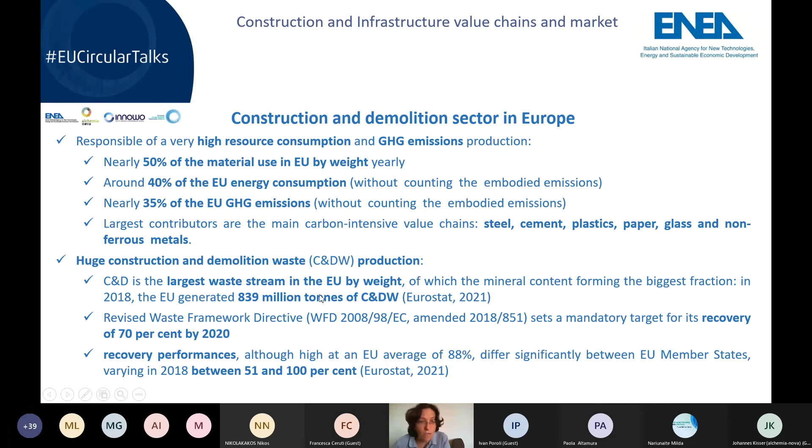Whatever they will come from, whether this value chain of construction infrastructure, or even if they are coming from other value chains, whatever sectors they are. Last year we did some work for the previous circular talk, the previous seminar we did.

We focused on some strengths and some weaknesses of this sector in Europe. There are some strengths that are also opportunities to improve in material circulation, and in improvement of the production processes.

There is potential in extending the lifespan of products, and in the huge amount of construction demolition waste, which from one side is a problem, but from the other side can be a potential for reutilization.

But in my opinion, this potential matters when it is used in substitution of primary materials. So construction demolition waste is useful and a very good opportunity, but only when used in substitution. In this regard, there is still room for improvement.

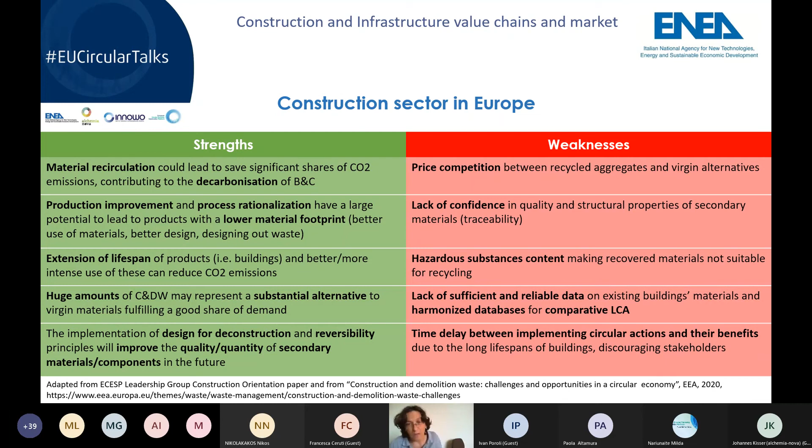Last year we did a first orientation paper, which is available online, where you can find data on policy background, contribution to carbon neutrality of this sector, and so on. Now we are going to update this orientation paper, which will lead to an output paper of this twin event, available after the event. So please stay online and stay tuned to have this output paper when it is ready.

Last year, through the orientation paper, we focused on some areas of intervention to improve circularity in the construction sector. This year, we will do something similar during these twin events, trying to gather contributions from stakeholders participating in this event to better understand the strengths and potential of these sectors in the transition to the circular economy.

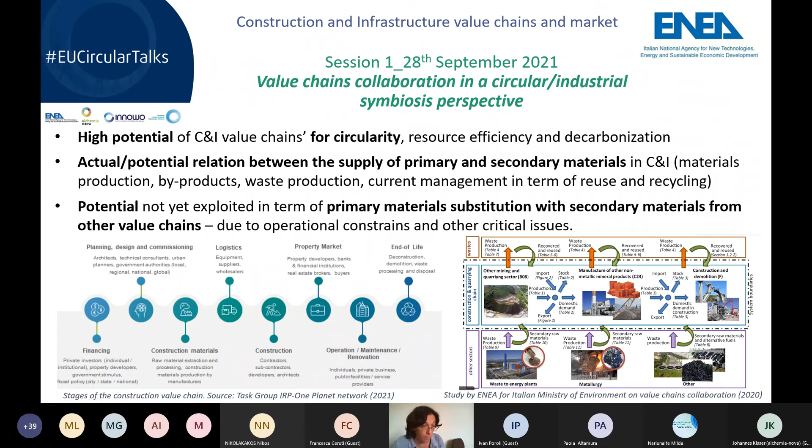The session on Tuesday will focus on the market of primary and secondary building materials. Here are listed some barriers and levers, but we will discuss this part on Tuesday.

Now, to end my speech, I would like you to contribute to this first poll by going to slido.com and typing this code to participate. The Slido will be open during the session, and you'll be asked which issues you think are most strategic in order to boost value chain collaboration and connection within the construction sector and with other sectors. Please connect to Slido, type the code, and contribute to building this map.

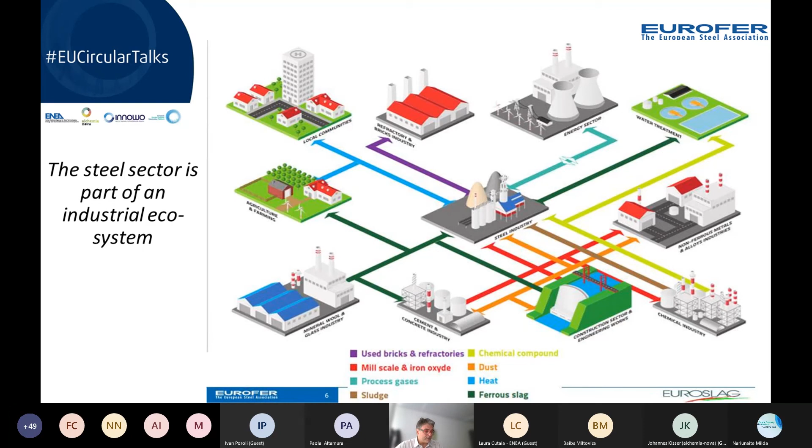So, well, the steel sector — we are talking about symbiosis. If you look at this graph that I prepared based on a European survey, you see the steel industry has, for decades, been working in this way using synergies. We exchange as many material streams as possible together with other sectors, aiming at having nothing go to waste. We exchange with cement, construction, agriculture, refractory industries, the energy sector, and the chemical industry. So we are part of the industrial ecosystem, meaning all industries are linked together and related. That's an important element, because the industry of the future should work in this way.

I would like to go directly to the core of my presentation. Today I would like to explore what the steel sector does with its main co-generated material. Together with steel, we generate ferrous slag. Ferrous slag comes from minerals and is used to protect the steel during liquid production, and this material also gives the steel its properties. That means they work in a sort of symbiosis themselves — without ferrous slag you cannot have steel. Every part of our process generates a different type of ferrous slag, meaning there isn't just one type; there are different types with different properties, which means we generate different types of artificial stones or aggregates.

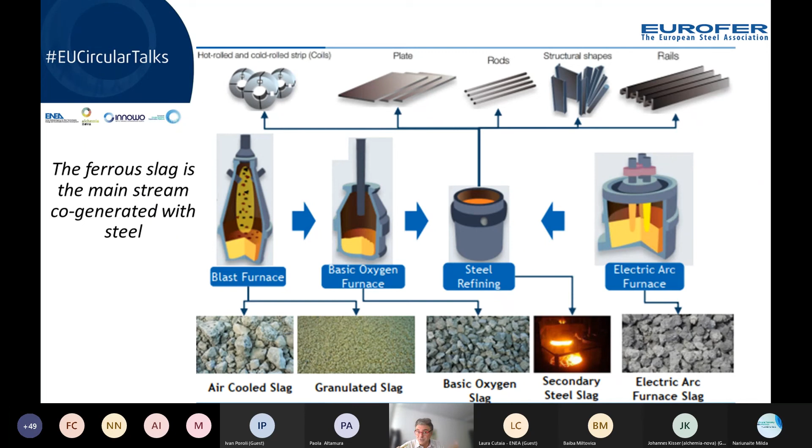If we look in terms of volumes, what does this mean? In 2016, for instance, we produced 158 million tons of steel at the European level, but together with this, the sector generated around 48 million tons of ferrous slag — that's quite a huge number. According to a survey that Eurofer performed with Euroslag, our European association collecting science and data on how to optimize the use of ferrous slag, we surveyed around 40 million tons of total slag.

We arrive at the numbers: around 34 million tons of ferrous slag is used among cement, concrete, additions to cement, road construction, engineering works, and so on. This makes ferrous slag a huge contributor to the construction sector as a secondary raw material.

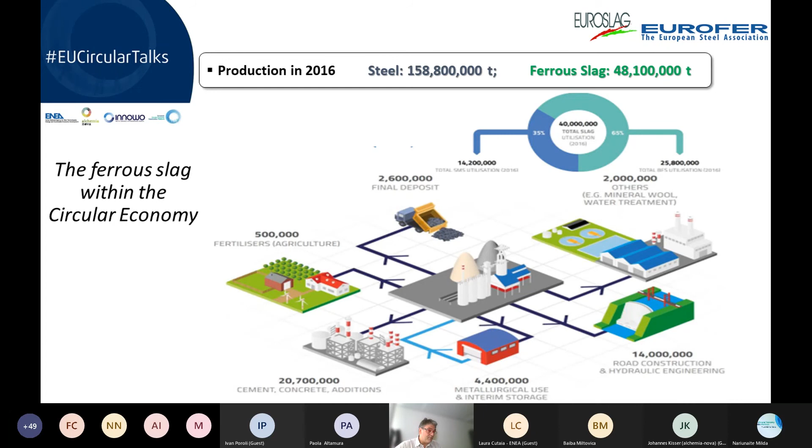Going more into identifying what ferrous slag is and its properties. Someone says the ferrous slag is waste from the steel sector. Well, I don't agree. The ferrous slag is material that is fatally co-generated with steel, not generated by chance, but together with the material. The industry now is working, and has been for decades, to improve the performance of this product. That means it's not waste that's just put aside waiting to figure out what to do with it. No, it's the contrary.

The ferrous slag comes out in a liquid phase, and then we try to give the material the right properties for the perfect use. For instance, we have granulated blast furnace slag that comes out from our primary production. This is almost 100% glazed and is latently hydraulic, which makes it perfect to work in synergy with cement or other cementitious materials to create new, more sustainable products for the future.

Or we have slag from the blast furnace that is not granulated but air-cooled. Then it becomes like an aggregate, like a stone, with a crystalline structure and is inert. Or we can have slag from an electric arc furnace, which is secondary production using ferrous scrap. Then there's some new process to granulate and vitrify the material in order to give it the perfect properties.

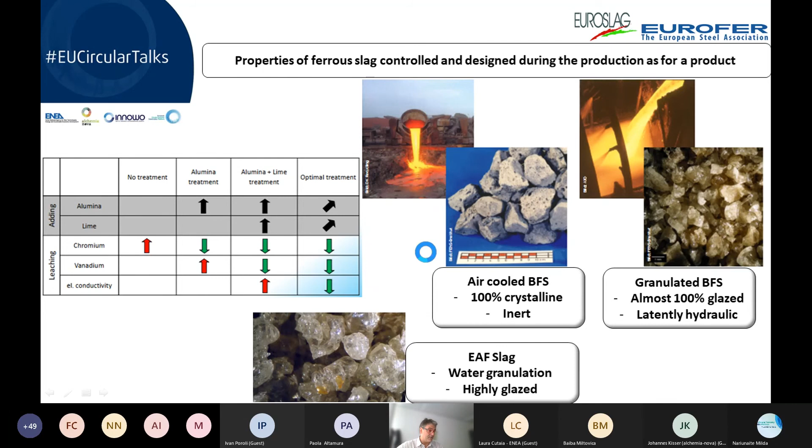Then you add some alumina, some lime, so we arrive at the right recipe just to ensure nothing will go into the environment. That's rather different than saying ferrous slag is waste. It's more a secondary raw material. And in fact, I put together some photos and examples.

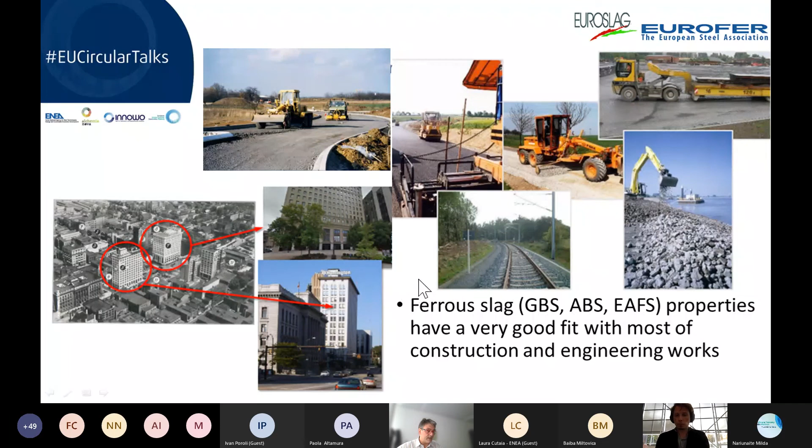Or you can use ferroslag to replace aggregate for road construction. Sometimes, in certain applications, I would say ferroslag gives better performance because, for instance, the asphalt has more grip, there is more resistance. The layers below the asphalt are more durable and can last longer, giving high bearing capacity.

But going directly to what to do, what is the problem. I have still two slides and then I finish, Johannes.

The legislation: the ferrous slag for us is a byproduct, it's not waste. However, European law has different interpretations across countries, and there is no level playing field. For instance, procurement instruments often don't allow secondary raw materials in public tenders. Then, I've already heard it called a hazardous substance, but the pure precautionary principle, in the end, doesn't fit with circularity, because you cannot clean everything. The point is you need to create real conditions to have no risk. Otherwise, you will not have circularity.

The ferrous slag is REACH registered. That means there have been years of toxicology tests. We have made hundreds, and it's classified as not a hazardous substance, and there is no real risk. And third, from a practical point of view, is the legislation important?

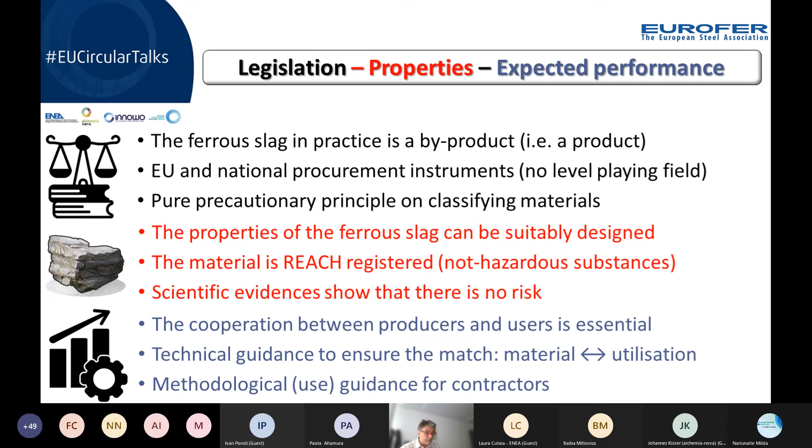Well, from our experience, it's more the cooperation between producers and users. What a user needs, which is performance, this is the starting point. You need to create a very large and robust knowledge base for technical aspects and environmental performance expected by contractors.

Rather, it's better to start working from what the construction sector needs, what the contractor needs, and from there to have a more fit-for-circularity framework, legislation that will not see the secondary resource as a waste by definition, but as something with a value.

And the last slide, just a reminder, what is necessary to be done? Well, of course, the technical approach should be harmonized. The member states have different views on this kind of material.

Secondly, I've reported here some examples. In France, there was a perfect example from Sétra, in which slag producers, contractors, and final users defined guidelines together. And the government said, well, this works. And then the slag is used there without any problems.

This is a more practical and more coherent approach: performance-based. The material you use, you should just look at the performance you expect. If it's natural or artificial, in the end, the circular economy doesn't matter.

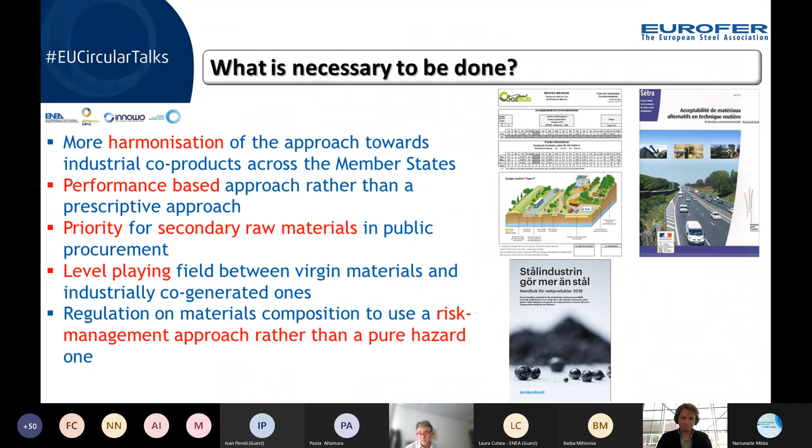I've been at my 10 minutes, maybe a little bit more, Johannes, sorry. But this is all, and of course I'm open to all the questions you may have, concerns, so I'm here. Thanks a lot.

Thank you so much, Aurelio. It was really interesting to listen to the industry side of the steel construction. It's obvious that it has many byproducts, and they should be utilized in industrial symbiosis or for any type of reuse scheme. That's clear. So thank you so much. I hope we'll catch up and we get some attention on that also in the future.

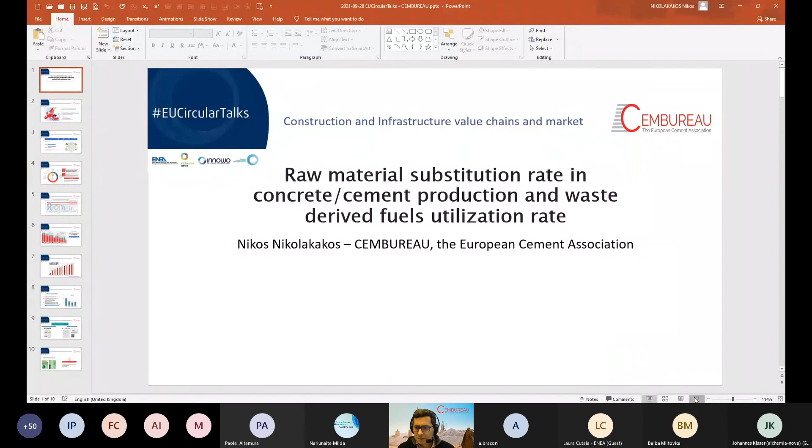Hello, Johannes. I hope you can hear me well. Good morning to everyone. We can hear you loud and clear. Thank you. Very nice to be here. I will try to share my slides. Perfect, we can see them. Okay.

I will give a presentation on behalf of CEMBUREAU about the contribution of the cement sector to the circular economy and the use of raw materials and waste-derived fuels. As an introduction, CEMBUREAU is the European Cement Association, based in Brussels. In this map here, we can see the members of CEMBUREAU, which are the national cement associations of the EU countries, plus some more countries like Turkey, which are not in the EU.

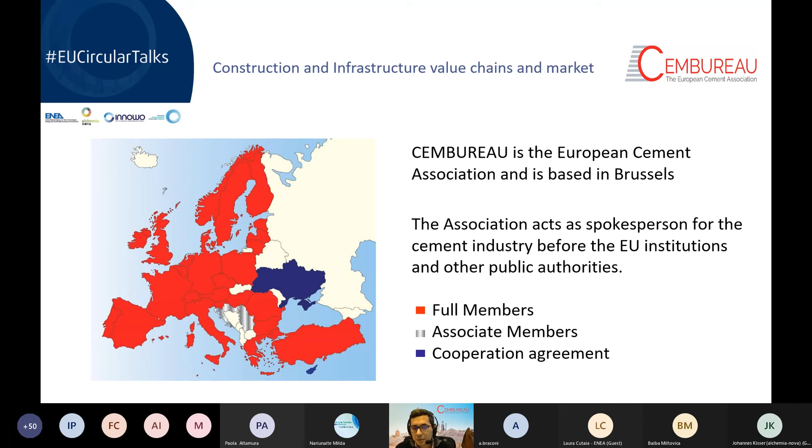The main driver for the circular economy and the policies at the moment is the reduction of greenhouse gas emissions. We see the targets set by the European Union for 2020, 2030, and 2050, and what has actually been achieved in 2015. There are several regulations like the so-called communications by the European Commission, like the Clean Planet for All in November 2018.

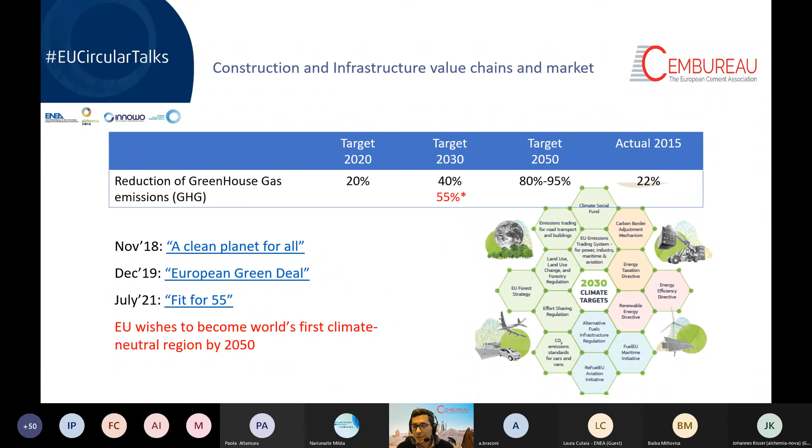2019 brought the European Green Deal, which is still active. And very lately, just a few months ago, was Fit for 55, a mix of regulations described briefly in this chart, containing many different regulations which all aim to reduce greenhouse gas emissions. The vision of the EU is to become the first climate neutral region in the world.

Now, as CEMBUREAU, what we try to do to respond to all these challenges is create a roadmap for how to reach zero CO2 emissions in 2050. We have identified different pathways, starting from clinker production, then cement manufacturing, then concrete, because cement is an intermediate product. The actual building material is concrete, then construction, and finally carbonation, which is the absorption of CO2 emissions during the lifetime of the building.

We have specific targets for the different pathways. For example, to reach 60% alternative fuel rate in 2030 and 90% in 2050, and to use decarbonated raw materials, along with specific policy asks like access to non-recyclable waste and biomass waste, facilitating waste shipment, and very importantly, banning the landfilling of waste.

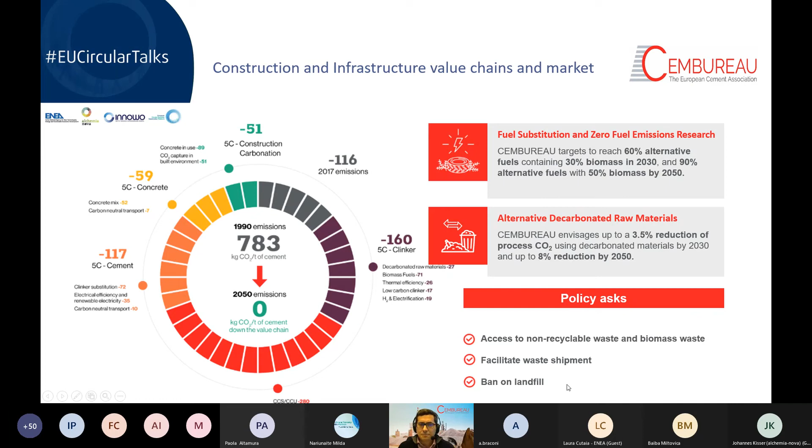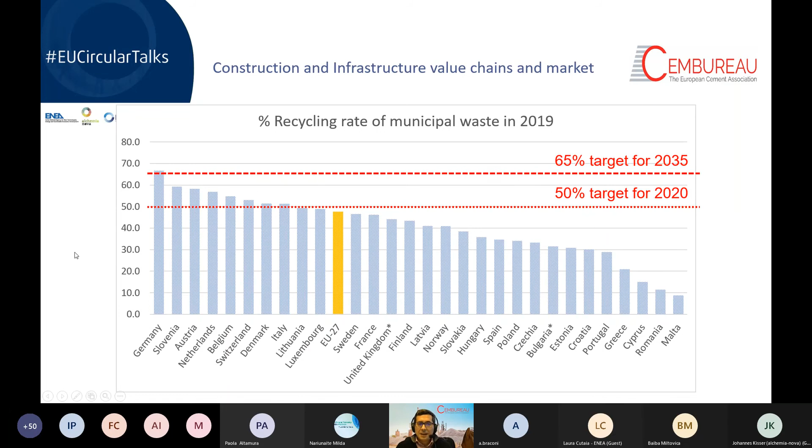What's interesting is the rate of co-processing, the use of alternative fuels in the cement industry to substitute fossil fuels. This rate was measured by the consulting company Ecofys in a study prepared for CEMBUREAU in 2017. We see that countries with a high rate of municipal waste recycling also have a high rate of co-processing, and the opposite: countries with low co-processing have low municipal waste recycling.

This led to a conclusion that it's not technical investments or technical aspects that hamper the increase of use of alternative fuels and waste-derived fuels in the cement sector, but rather having a good, advanced waste management system so there is available material to use in the cement sector.

And this is where our support for policies comes in, like reducing landfilling, increasing landfilling taxes, banning landfilling, and improving separate waste collection.

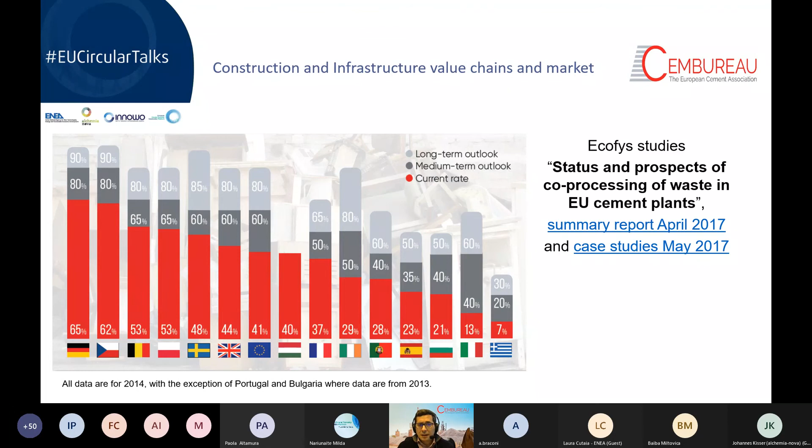The other 50% comes from fossil fuels like petcoke and coal. Our aim is to reach 90% substitution rate, so almost all the thermal energy comes from alternative fuels.

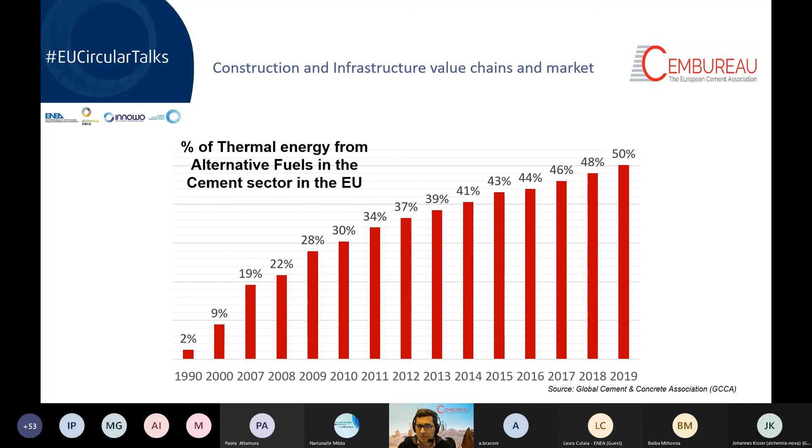Some advantages of co-processing, this technology of using waste for heat in the cement sector, is that it combines both material recycling and energy recovery, because the mineral part of the waste, like the iron contained in end-of-life tires, becomes part of the clinker, so it's a kind of recycling. Also, cement kilns represent existing and available installations, so there's no need to invest in new waste-to-energy or waste incinerator facilities.

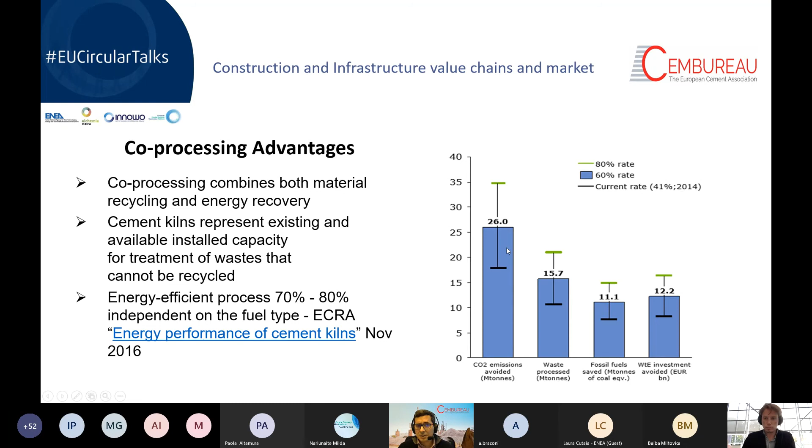This is some of our policy asks at European level, and also to use both high quality and low quality recycling. We believe there is room for both.

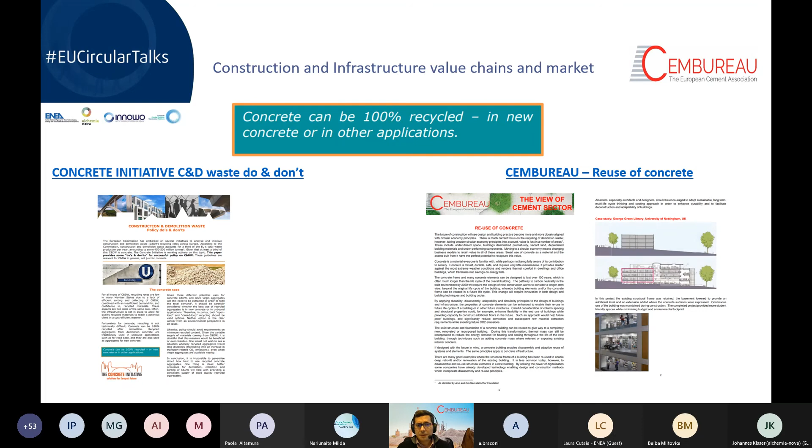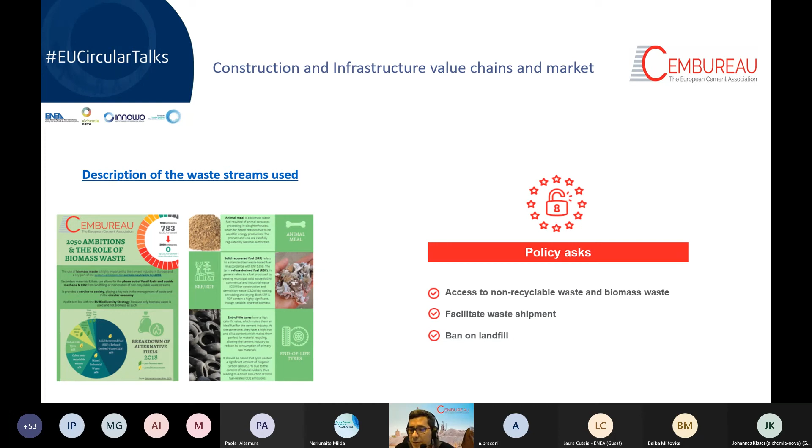I have not covered the raw materials used for cement production. As Aurelio said before, blast furnace slag is a material that has been very well used in previous years, very well established, and it's a very good material for the cement sector. Thank you very much for your attention, and I will be glad to answer any questions that follow.

Thank you. That was a great view on how the cement industry looks at that, and I think that's applicable to the whole cement industry in general, and also this reuse of construction demolition waste should become the norm. I still see some hindrances, but I also see many applications in this urban mining.

When we were searching for smaller crushing equipment, like concrete shredders, it was not always easy to find in all the sizes that we want, but I'm sure the market will catch up on that as well for reuse and then reconstruction. So great, thank you, Nikos.

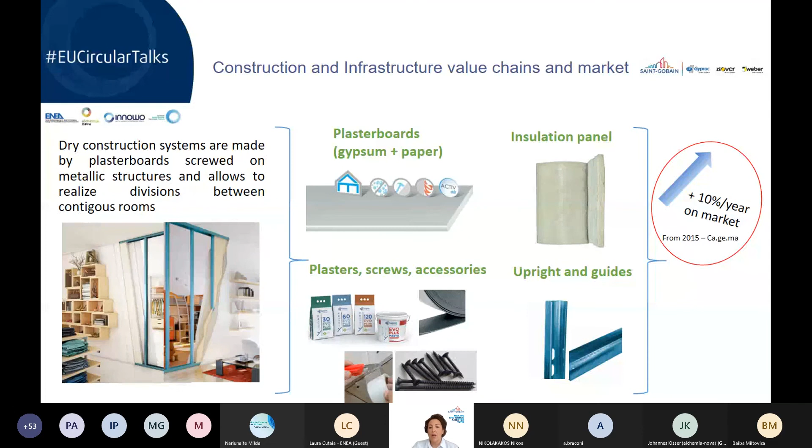Dry construction systems are made of plasterboard and very often insulation panels screwed onto a metallic structure, used to divide contiguous rooms. Today I'll put the attention on the main components: plasterboards and insulation panels. This kind of construction system is a modern system that has grown a lot in recent years, about 10% per year since 2015.

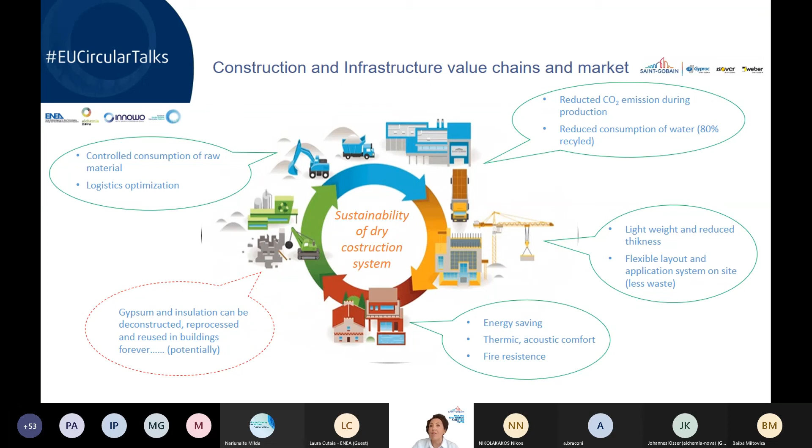And surely this is due to the sustainability of the process, the chain of this kind of construction system. But the weak link for the construction chain, the using chain, is the end of life of the products, because even if gypsum and insulation can be deconstructed, reprocessed and reused in building forever, actually it doesn't happen. And market data shows this, because more than 50% of dry construction system waste is sent to landfill, because there isn't a controlled waste management chain, because there isn't a specific recycling solution, and because the costs for waste management are very high.

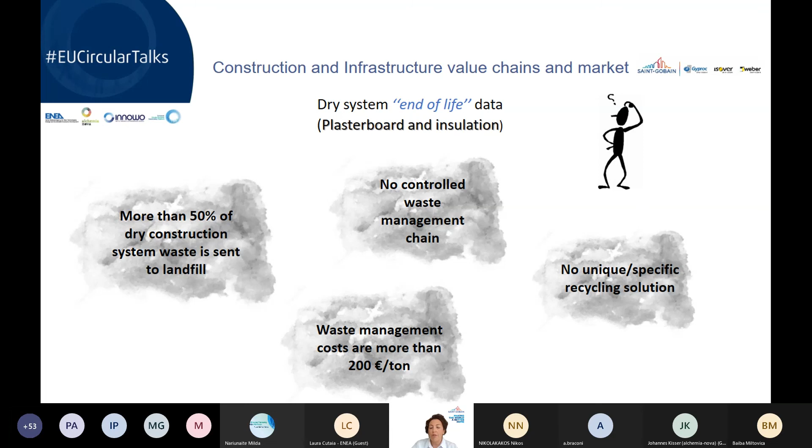So to understand the problems, we have to talk differently about the plasterboard industry and the insulation industry. In the plasterboard industry, the situation is quite good, because more than 80% of internal scraps are recycled in production plants, and because production plants are able to substitute more or less 5% of raw material with recycled gypsum, mainly from internal scraps but also from the construction demolition sector. And now, since 2 or 3 months, many producers have launched 2 or 3 products on the market that have a high recycled gypsum content.

In the insulation industry, the situation is not so good, because in production plants just 3% of internal scraps is used, and none from construction demolition. And a great quantity of production insulation waste, but also construction demolition waste, is sent to landfill and treated as dangerous waste.

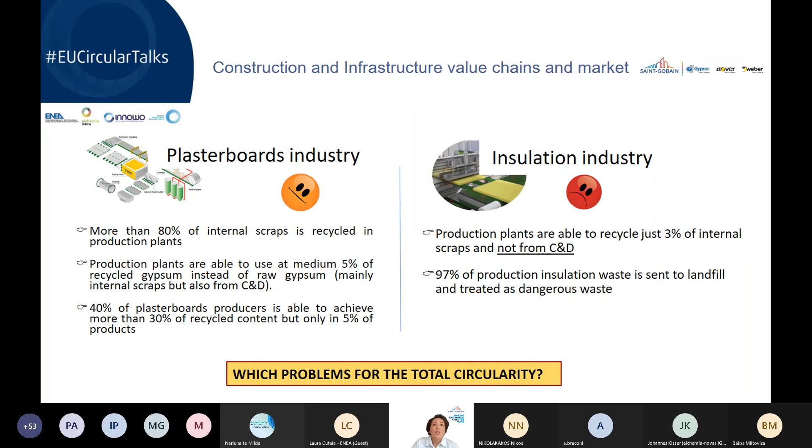So the question is, what are the problems for circularity? The first problem is found on the building side, where there isn't a culture of selective demolition, partly because the legislation is not sufficient for this aspect. Controls don't exist at the building site, and wastes are mixed without a selection that should instead be made to guarantee recyclability of waste.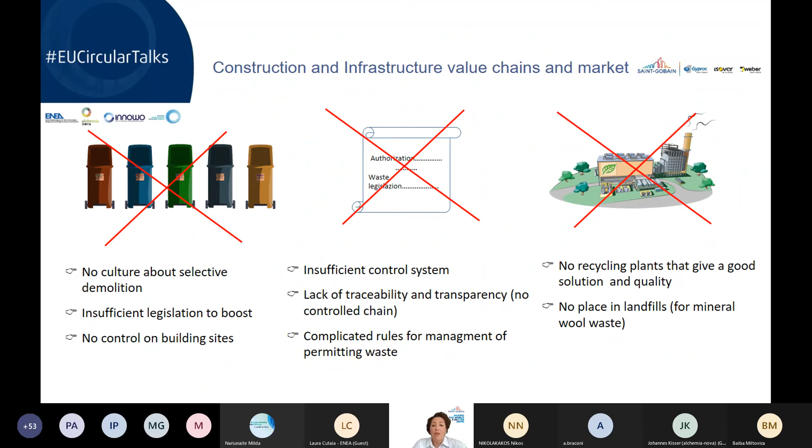Furthermore, legislation gives very complicated rules for management of waste, and the authorization process is very often too long. As a consequence, but not only for this reason, for gypsum waste there aren't well-performing recycling solutions, and for insulation waste, we don't have any recycling solution at all.

So another time we put a different attention for gypsum waste and insulation waste, because in national territory for gypsum waste we have 4 recycling dedicated plants, but only 4 for the whole territory, and we still have availability in landfills. So what happens in the construction site?

It happens that gypsum wastes are mixed very often with other construction demolition waste without selection and sent to landfills or general recycling plants. And this is a problem because there isn't traceability for waste to have a good recycling process and a good secondary raw material.

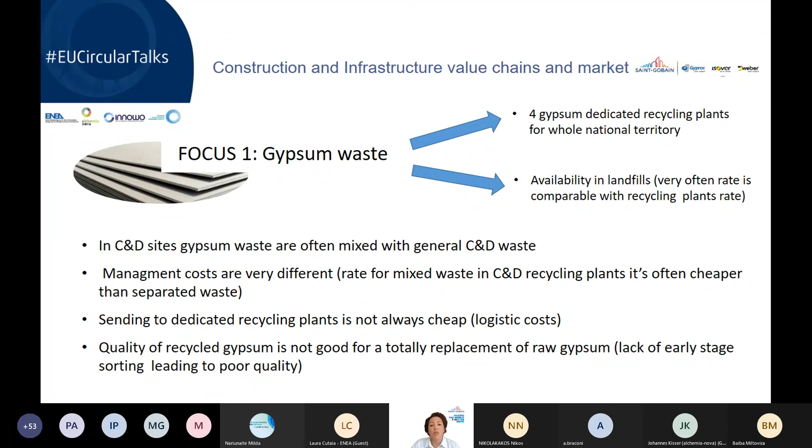For insulation, the problems are greater because we don't have a recycling solution, and we don't have enough availability in landfill. Even though there is confusion in the characterization of waste, because waste coming from modern insulation panels is surely not dangerous since the fibers are biosoluble.

But the problem is when the waste comes from old panels, because it's very expensive to analyze the fiber when it becomes waste. So when waste arrives at landfill, all types are considered dangerous and sent abroad, because abroad we have more availability and the costs are cheaper.

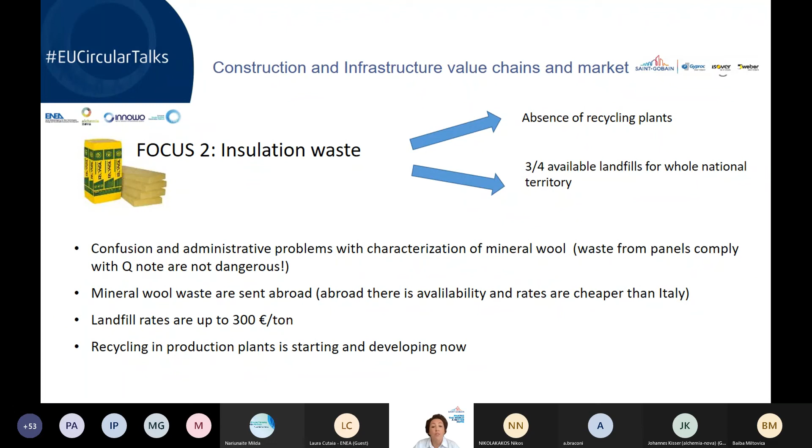So to summarize, there isn't a clear system of control and characterization of waste in construction demolition sites. It's difficult to develop a controlled management chain for waste. It's difficult to have a performing recycling solution.

And as a consequence, the quality of secondary raw material is not good enough for a total replacement of raw material. And the management chain is very expensive compared to the supplying of raw materials. So we don't have circularity.

Fortunately, something is changing because there is a shared willingness between producers to implement a controlled value chain for their products, because the dialogue with the authorities is more constructive and productive, because industries are investing in new technologies to implement a new system to use secondary raw materials, and because national regulations are moving toward sustainability and circularity to improve green procurement.

So which opportunities can we catch? First of all, we have to use any possible financial form — resilience and recovery plans, but also other financial forms to upgrade technologies in the industries and also to upgrade recycling technologies.

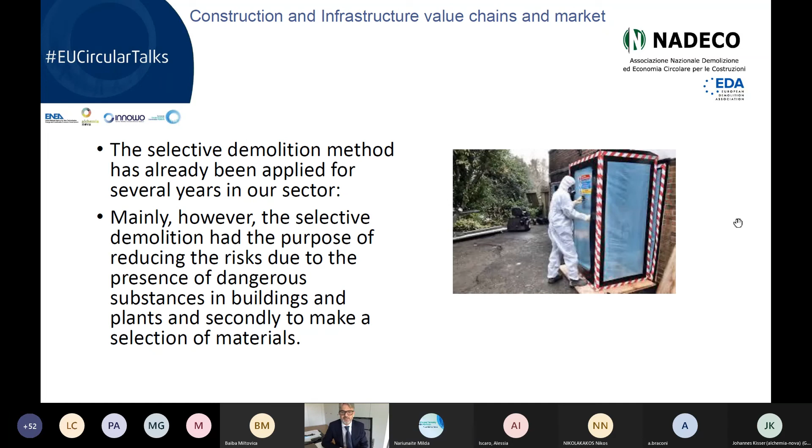Selective demolition taken to a higher level needs an adequate preventive design to identify the types of materials and the best selective removal techniques: more space for storage of separated waste for different types, more execution times, more manpower hours to remove the materials, new machines, and new operation procedures.

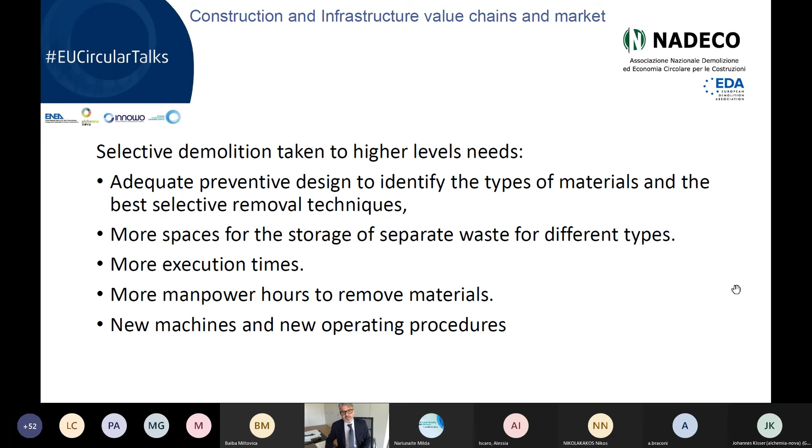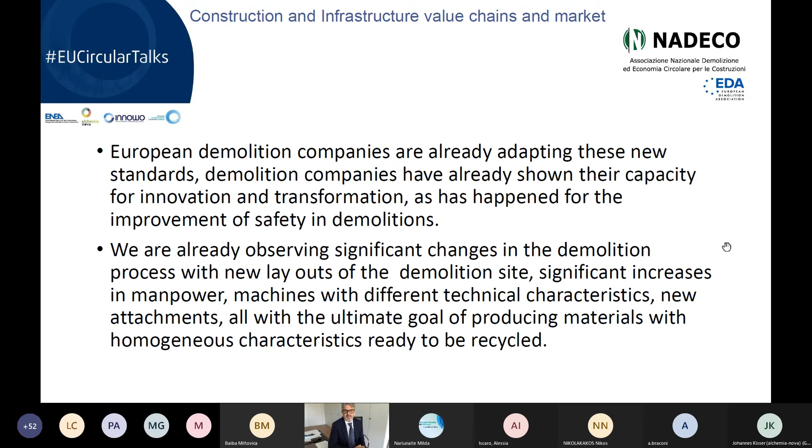European demolition companies are already adapting to these new standards. Demolition companies have already shown their capacity for innovation and transformation, as happened for example with improvements for safety in demolition. We are now observing significant changes in the demolition process, with new layouts of the demolition site, significant increases in manpower, machines with different technical characteristics, new attachments - all with the ultimate goal of producing materials with homogeneous characteristics ready to be recycled.

But all this is not enough. Today, the balance between costs and benefits still hangs dramatically towards the cost. For example, costs include the risk of penalties because the law is very complicated in many countries in Europe. More space is needed to perform a selective demolition, more execution time is needed, and it involves higher costs of safety and higher costs for manpower. The benefits now are poor.

Typically, a lower disposal cost is achieved if the waste is correctly separated and treated. There is also the economic value of materials - if, for example, the scrap is very clean, the economic value can rise. But these benefits don't balance the cost. So what are we doing to balance the cost and the benefits?

In order to start the virtuous process of a circular economy, an effective incentive system must be combined with selective demolition. Incentives can shift the balance point toward the benefits. What could the incentive system be?

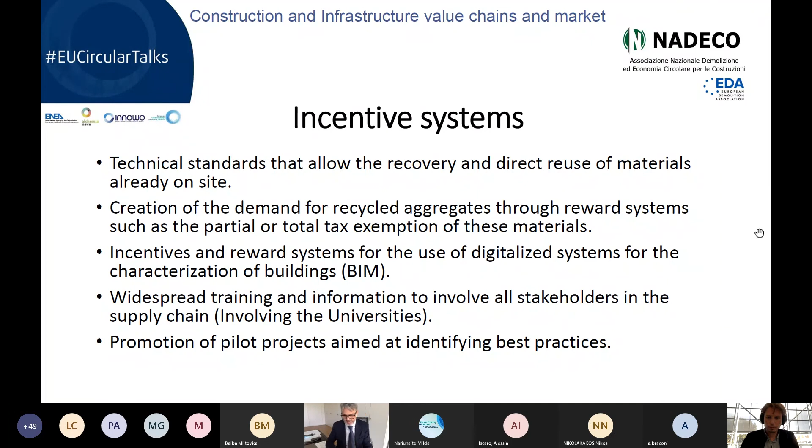In conclusion, we think that circular economy in the demolition market will be supported by three pillars. The first pillar is that of companies. They must develop a new approach, a new technical and design approach to the demolition project.

A contribution to the development of new machinery for selective demolition. Development of a clear definition of recycling targets for each project, operation procedures, and the concrete feasibility of the project. The second pillar is that of the government, which must issue an adequate regulatory and law system.

Applicability of the end of waste criteria to the highest number of construction and demolition waste categories, the possibility of treatment also on site, creation of an incentive system, and the market. The third pillar is that the market must evolve towards a real market and economically sustainable supply chain for recycled materials, and a real market for the reuse of demolition objects.

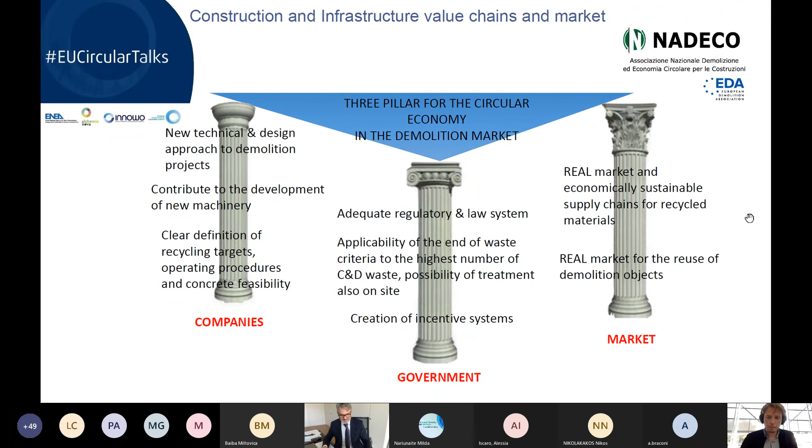Thanks for the kind attention, and I'm sorry for my bad English.

Thank you very much. Thank you, Ivan. I think it was all right, and we all understood. It's a very nice wish list, like sending it to Santa Claus for next year. Santa Claus is near. That's almost like if we all implement these solutions, I think we have solved most of the things. So thank you so much, Ivan. This was a very nice overview of recommendations that we need for implementing circular economy thinking in the construction sector.

Now we have two speakers left, and I'm happy now to introduce to you Margherita Galli from Federbeton. She comes from environmental engineering and economics, and worked at ISPRA, which is the Environmental Protection Agency from Italy, and then for many years in the concrete area from ATECAP and now Federbeton. Please, Margherita, the floor is yours.

Thank you. Thank you. Good morning, everyone. I will share my presentation. Can you see it? Yes. Okay.

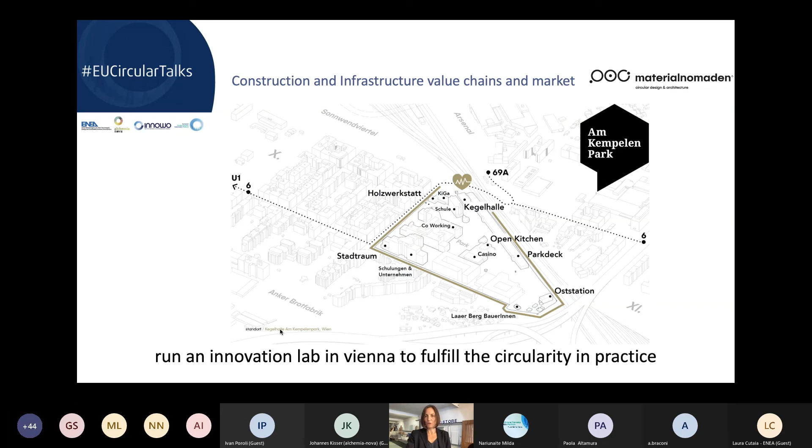This is our location where we run and develop an innovation lab to fulfill circularity in practice, which is quite singular here in Vienna, though there are a few other architecture offices who try to bring reuse into practice.

How do we do it? We design and develop reuse products. We call our products limited edition designs because the source we use is always limited. Our source is buildings which will be deconstructed, or materials out of production from other companies who produce materials for the building industries, but there are many different materials as we'll see later on.

One of the buildings which was available was a big, huge office building. Here you can see the columns. What do we do? We go to the buildings and we make material catalogs, and these material catalogs are our source for inspiring the development of new products.

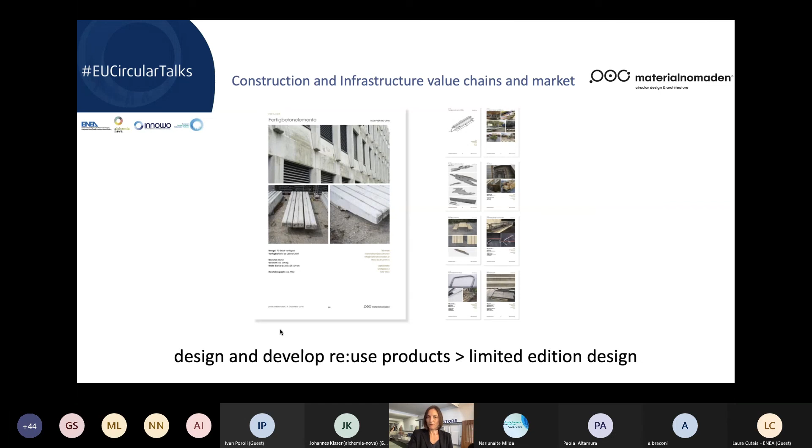We have our workshops for wood and metal, where we assemble prototypes and one-to-one mock-ups as well as models. This is how we do it.

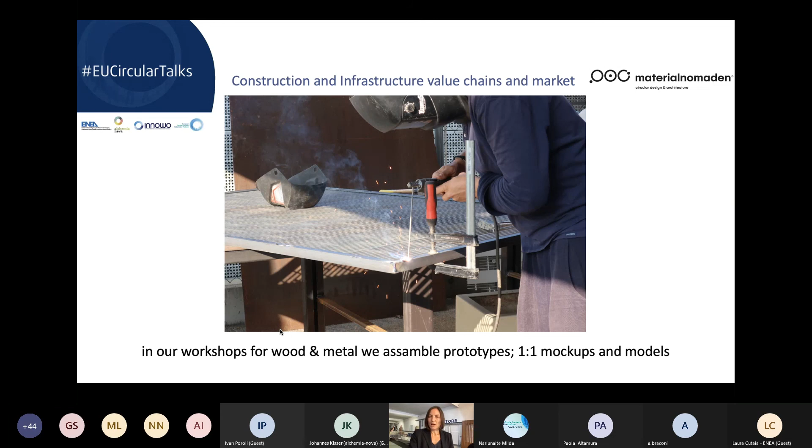We go to buildings where we are invited by the building owners, who see the potential of using the material as it is there. The ideal situation is to reduce - meaning we use what already exists, the structure itself. This would be the first task: a new design or development for offices, living, architecture, but also we continue developing products for the building industry as well as design products.

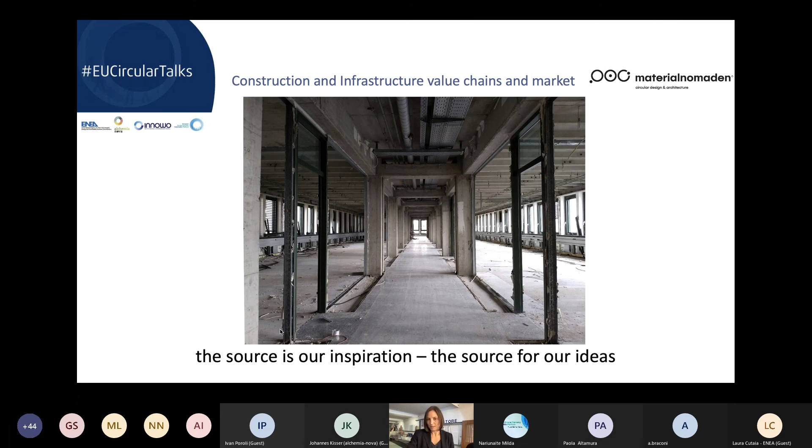This is the source for our ideas, and if it's not possible to use the first structure, we reuse materials. There are lots of different materials built inside the buildings, and it's a very complex process to get into this demolition process.

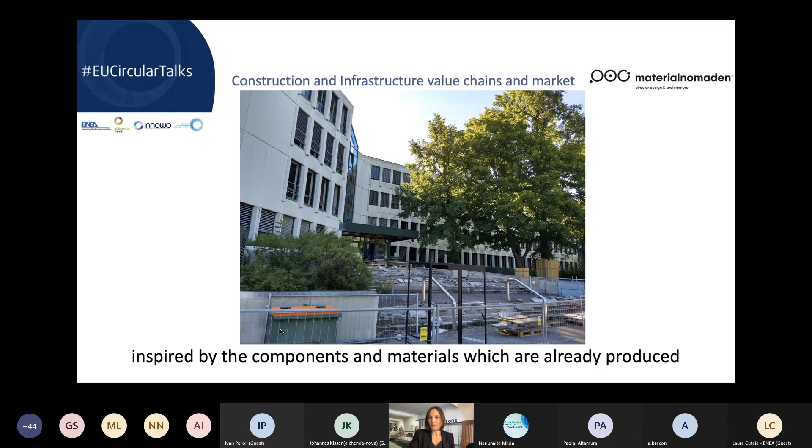With this project, we were able to harvest material with the demolition company as well, as we'll see later on. We will also see that there are already products which we can transform with a little piece of new technology and use as a lamp. This is a one-to-one product, and the energy inside the product is transferred into a new product. So we don't need to recycle, but just transfer one small part and use it as a new certified product.

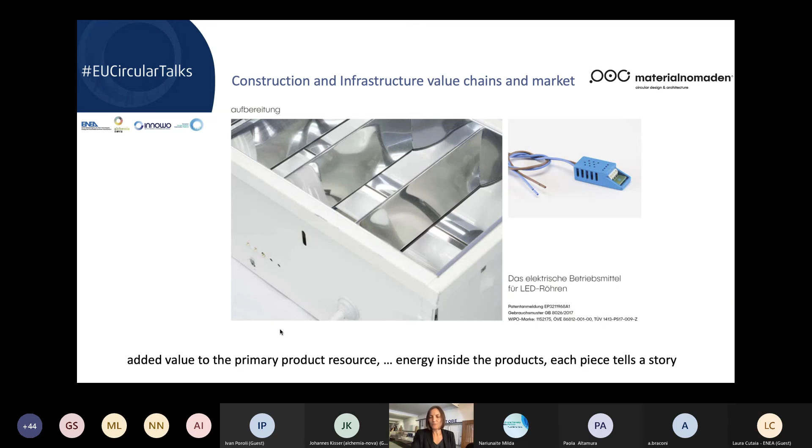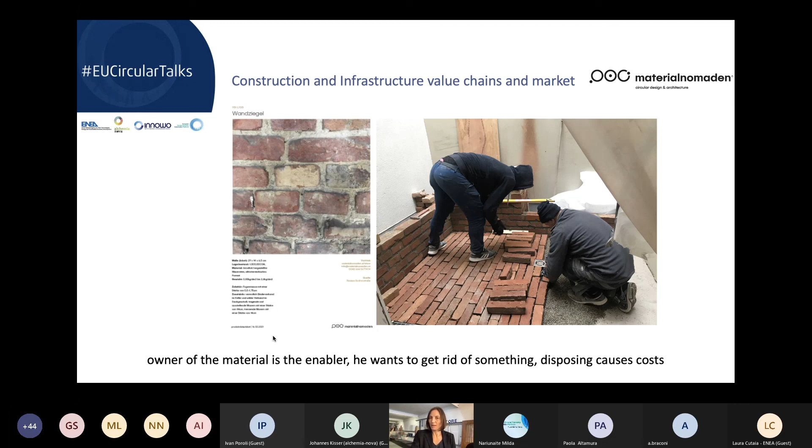Also available materials are the bricks. What is easier than to recycle the bricks? We cut the bricks and use them with a different function. So the material is available if the enabler wants to get rid of it, and the disposing costs are kind of the limit of what he is paying. But right now the enabler doesn't have to pay the real costs caused by disposing.

As we have seen before with the demolition companies, it needs lots of manpower and different or new machines to make it possible to deconstruct the building without demolishing.

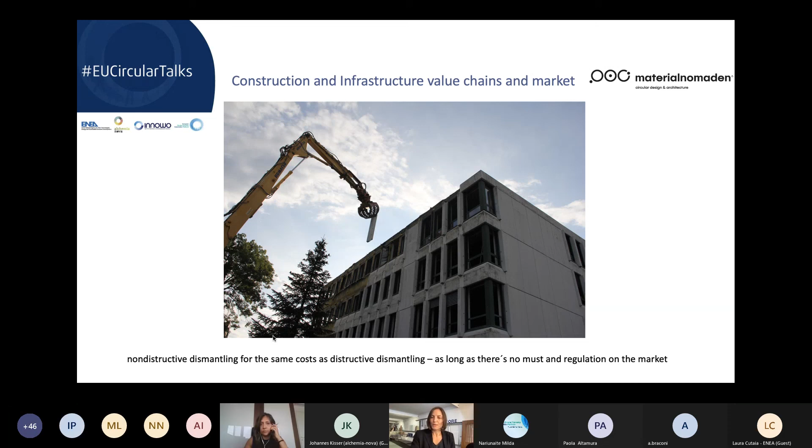So there we are using these pillows as benches. We worked together, and the machine put down the pillows one-to-one. At the same site, at the location, we built up pop-up stores, showrooms, and sample recoveries to raise awareness that there is so much material for planners and the creative industry to reuse.

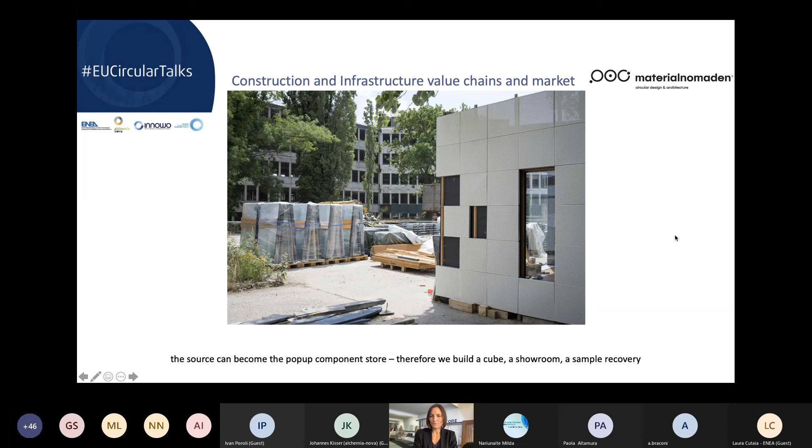As well, in the back, you see the Restore - that's our library of different materials, making them visible. It's also aimed at building up a network within Europe with other offices. Restore is a B2B marketplace for resource components, and we also run this store locally here in Austria.

The challenge is to make this material digitally available on the platform, but also to implement new technologies to combine handcraft technologies with new methods of constructing new buildings and building products.

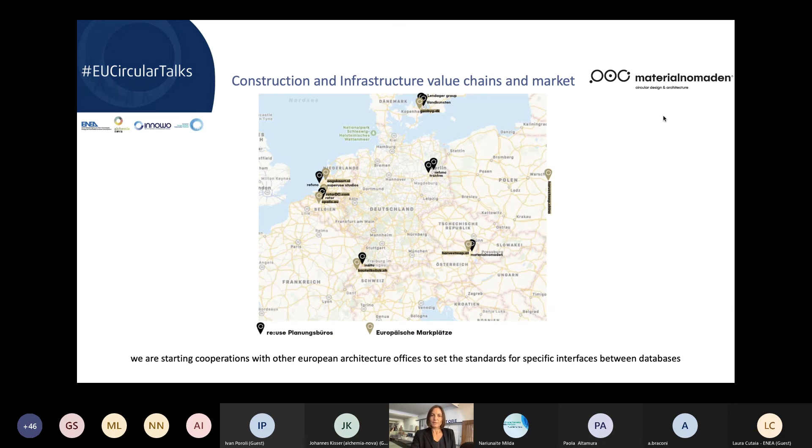This is our aim, that next year we want to set up this network on the European level to work and define the interfaces, because the databases should be available across all the different locations where we set up new projects with existing materials.

So here you can see the chain. How does it work? We have the source, the process of dismantling, of non-destructive dismantling, and we use it as much as possible in a form that doesn't need so much energy to get a new recycling material - we want to use it in a way that energy is saved.

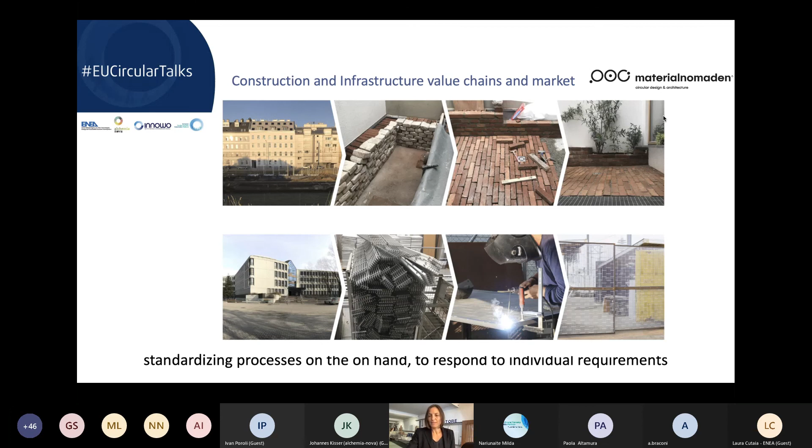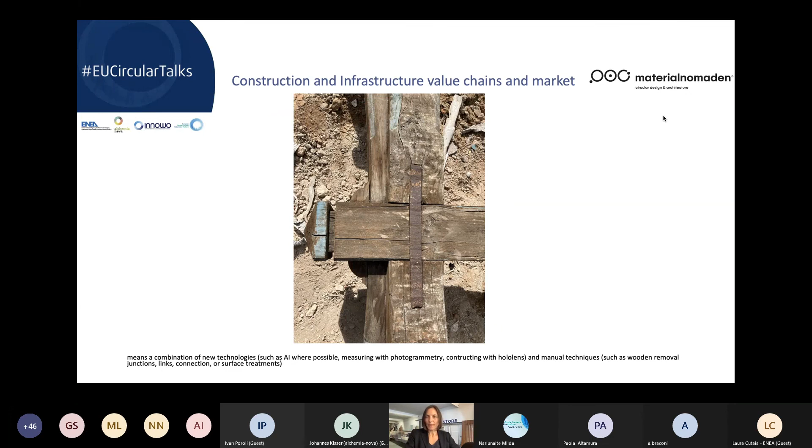But the creativity to make new products is the most important challenge for our practice. Here you can see the old traditional parts put together, which shows that in our daily building industry, dismantling is not going to be easier than it was 100 or 200 years ago, because the products were put together in a simple way.

These technologies are necessary to keep ongoing and combine with our new technologies. This makes it necessary to work within a huge interdisciplinary field, and we are also working on CO2 assessment tools that we can use with regulatives and pricing systems to make clients use these systems to save CO2 and make visible how much energy can be saved.

So yeah, this was a small insight into our practice. Thank you.

Thank you, Andrea. I think it's really valuable how we can find a methodology of how we can dismantle, deconstruct, and then reuse the materials. And for all the sector, if you crush concrete to rocks or gypsum and the like, you have to still consider further ways instead of using the whole material as such in the reuse mentality. So with the CO2 tool, you might be able to show the benefits of the different dismantling and recycling steps along the construction reuse scheme.

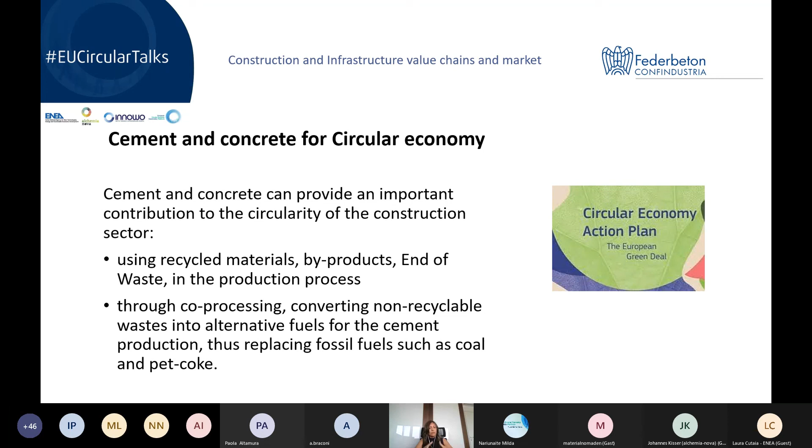As Nikos said before, since many years the cement industry replaces natural raw materials from quarries and mines with secondary raw materials. Likewise, through co-processing, non-recyclable wastes are being converted into alternative fuels for cement production, replacing fossil fuels such as coal and petcoke.

As per the activities done in the ECESP working groups, my intervention is going to focus on the specific topic concerning the usage of recycled aggregates for concrete production. Concrete is a mixture of cement, aggregates, water, admixtures, and some minor components as addition, fibers, and so forth.

Part of the natural aggregates from quarries can be replaced with recycled ones coming from the demolition of concrete structures, or with industrial aggregates such as steel slags.

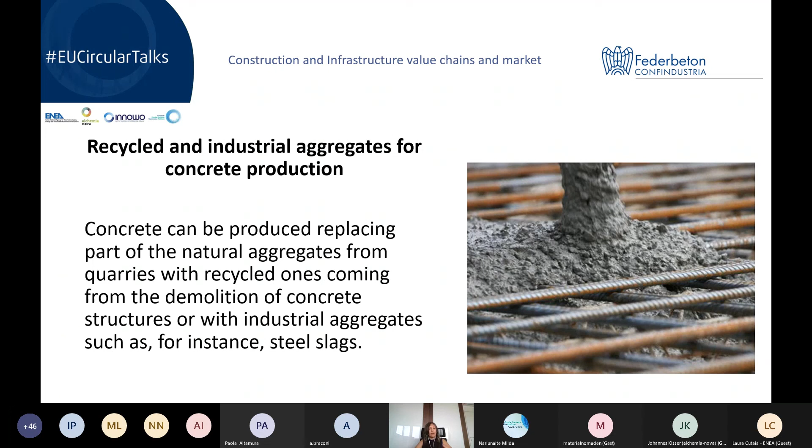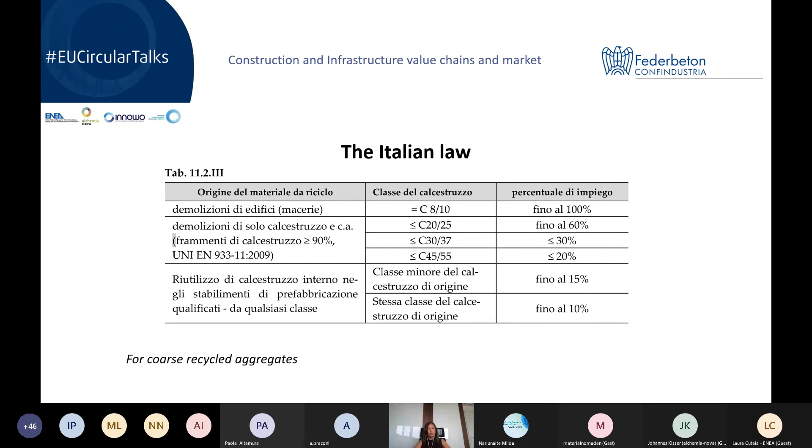Additionally, the national criteria for the green public procurement have been defined to be mandatory by the Italian government. Such criteria are issued by the Ministry of the Ecological Transition and are called minimum environmental criteria. In Italy, we have specific minimum environmental criteria for building, construction, and maintenance.

One of these criteria refers to ready-mixed and precast concrete, and it states that concrete must contain at least 5% by weight of recycled or recovered materials or byproducts.

The Ministry of the Ecological Transition is currently drafting the minimum environmental criteria for infrastructure. As the criteria for buildings, the one for infrastructure have specific requirements for recycled or recovered materials or byproducts in concrete.

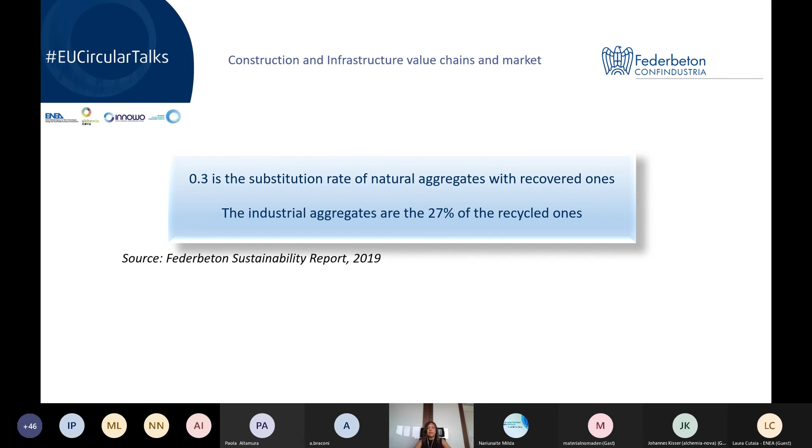And yet, the Federbeton Sustainability Report shows that during 2019, the substitution rate of natural aggregates with the recovered ones was still pretty low. In addition, recycled aggregates from construction and demolition waste could be used to replace part of the raw material necessary for clinker production, and some companies are implementing this.

Besides, at Federbeton we are moving forward with a study on this topic, and this is a joint effort with the Italian Association of Recycled Aggregates Producers and the Italian Association of Natural Aggregates Producers.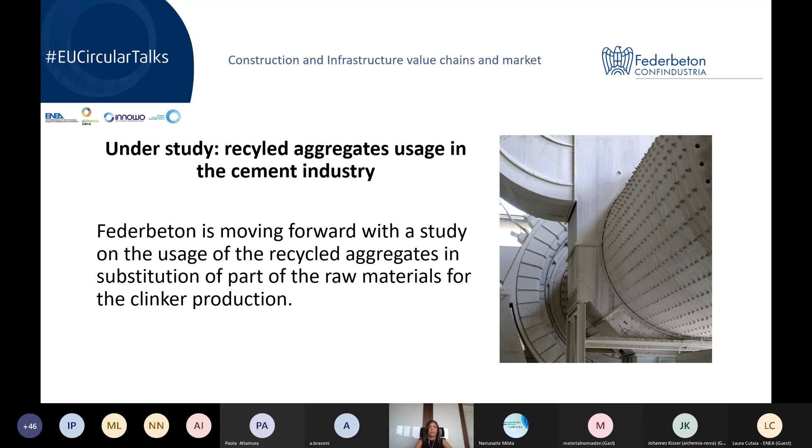Currently, the concrete producers are open to the usage of recycled aggregates, and most of the companies are investing in research on green products, the ones responding to the requirements of the green public procurements.

The biggest problem is that the Italian market does not have enough recycled aggregates made at least from 90% concrete, as it's being requested by the Italian law to produce structural concrete.

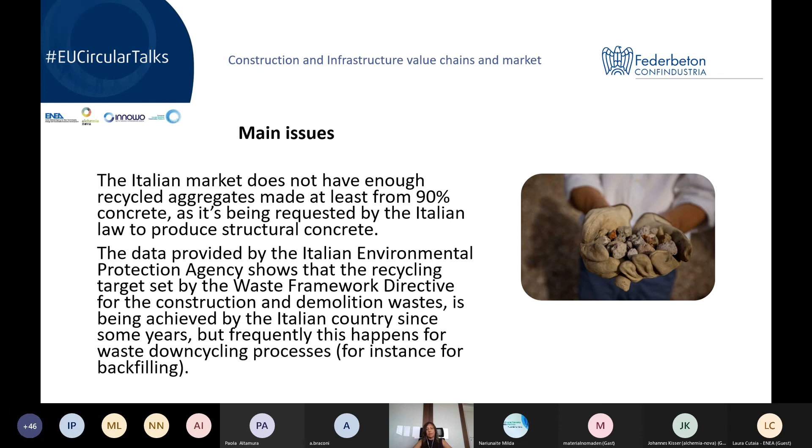The data provided by the Italian Environmental Protection Agency shows that the recycling target set by the Waste Framework Directive for construction and demolition waste is being achieved by the Italian country since some years, but frequently this happens for waste downcycling processes, for instance, for backfilling.

Now, I'd like to share some proposals scoped to increment the offer of high-quality recycled aggregates. First, we will need some leverages.

Government funding to improve either the technological level of the existing recycling plants or to build new ones, tax policies to make recycling products competitive on the market with the natural ones, and rewarding actions for projects where recovery materials are being used.

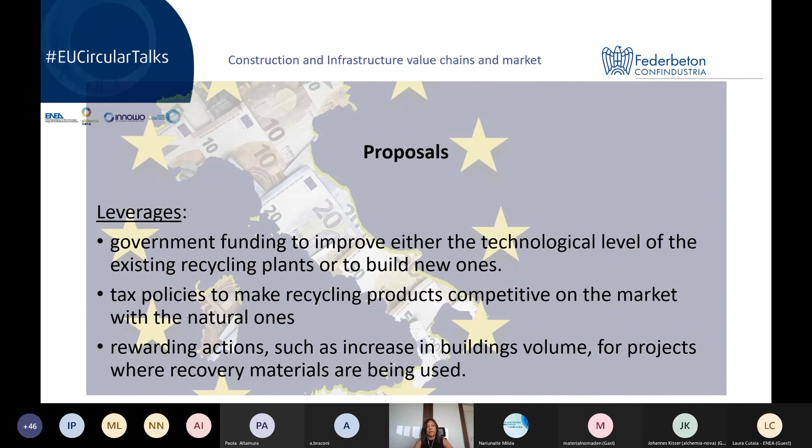And this rewarding system is currently being adopted by some public administration in Italy.

Other proposals are related to the actual need of having the national end-of-waste criteria for construction and demolition waste, which are going to be issued by the Ministry of the Ecological Transition, to facilitate industrial symbiosis, to the deployment of selective demolition where feasible, to the implementation of construction and demolition waste collection points.

The last two proposals give the direction on how to effectively separate the part of the construction and demolition waste which can be used to produce aggregates for structural concrete from the other constituents.

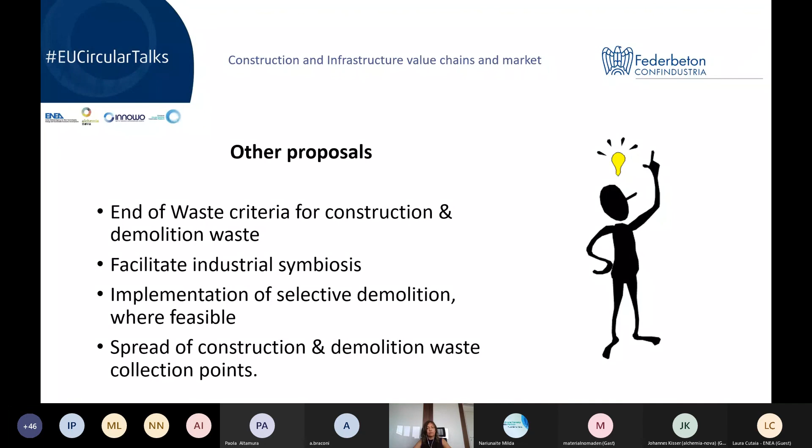We share most of these proposals in the Italian Circular Economy Stakeholder Platform, on which I'd like to spend a few words. ENEA chairs and coordinates ICESP as a mirror and integrated initiative of the European Circular Economy Stakeholder Platform, and as a national convergence point of initiatives, experience, and critical issues that Italy wants to represent in Europe.

ICESP has over 100 signatories and 169 good practices of circular economy collected in its platform. The path towards construction circular economy should be a joint effort among all stakeholders, such as policymakers, construction materials industries, recycled aggregates producers, construction companies, designers, environmental associations, certification bodies, and so forth. The ICESP effort is aligned with those principles, as most of such stakeholders are also working in the ICESP working groups. Specifically, I'd like to spend some words on the work done last year in the construction and demolition subgroup of the ICESP's working group number 4.

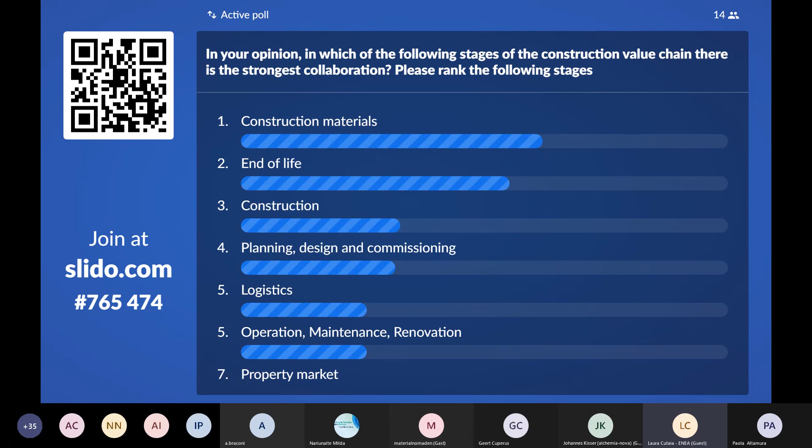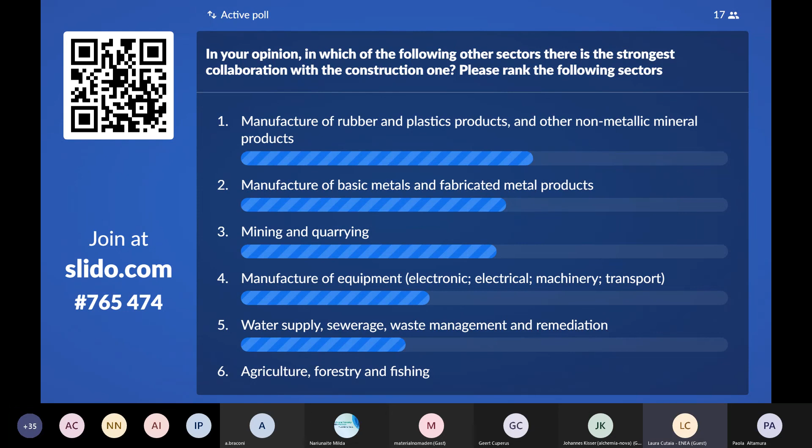We can go to the end. The last question was about the collaboration between the construction infrastructure sector and other sectors. Again we have first position for manufacture of rubber and plastics products, and other non-metallic mineral products. Then manufacturing of basic metals and fabricated metal products, let's say manufacturing of metals. Then mining and quarrying, and then water supply. Oh, there is manufacture of equipment. Water supply, sewerage, waste management and remediation, and agriculture in general.

Probably there is some room for improving collaboration between the agro-industry sector and recovery of material from, for example, waste, sewage, and so on, for the production of construction materials. I know there are many important experiences on this, so probably in the future we will learn more about it.

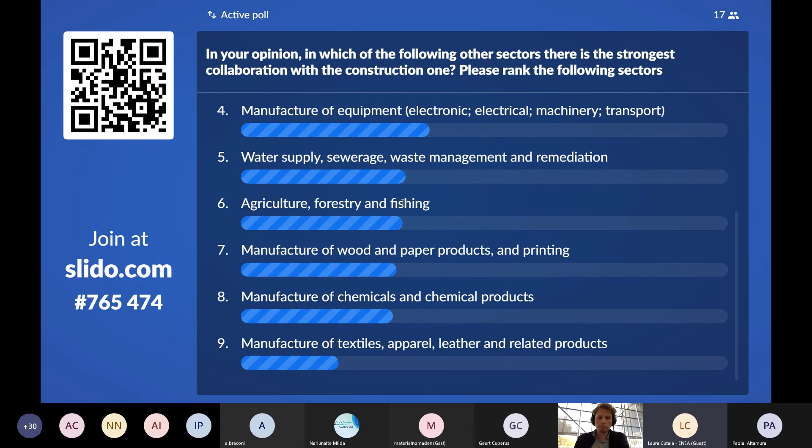Thank you, Laura. Now we have gained some insights on what we believe are the most important links. I think in today's circular talk, we have learned a lot about the industry's needs and wants for the future. I think the industry is prepared — they all know where they are going and where they should go in the future. I'm sure there will be many more interventions and activities to come.

On the reuse side, I think there's still a big market gap that will need to be addressed. On the recycling side of all the construction materials, I think we have not even taken a grasp of what are the demands of the future, how to make it possible that different materials, value loops, and resource flows in cities or settlements, and material exchange, is going to happen.

So we have seen the urban mining. We have seen that legal issues are still a big hindrance — the end of waste. We all know that it's, to be honest, not very often easy to work with secondary materials.

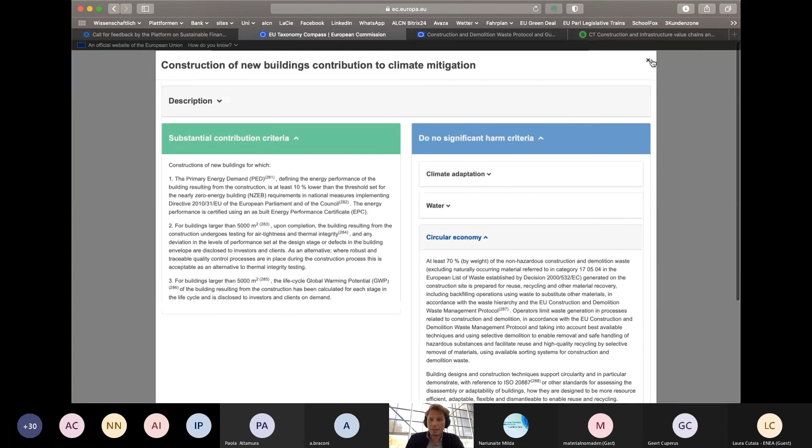And if you look at construction and real estate activities, you can see new buildings, renovation, and if you click on the plus for example, you can see details like climate adaptation and circular economy criteria. This is what they say will be the standard for getting a positive finance scheme, and in the future only sustainable projects will be financed — that's the whole idea of this EU taxonomy.

So I really recommend, besides the Renovation Wave and all these Green Deal measures that touch on our work, to really look into the EU taxonomy and what they plan for the construction sector. With these words, and in the belief that we will make it happen, we've just seen the very beginning of the big transformation of the construction sector.